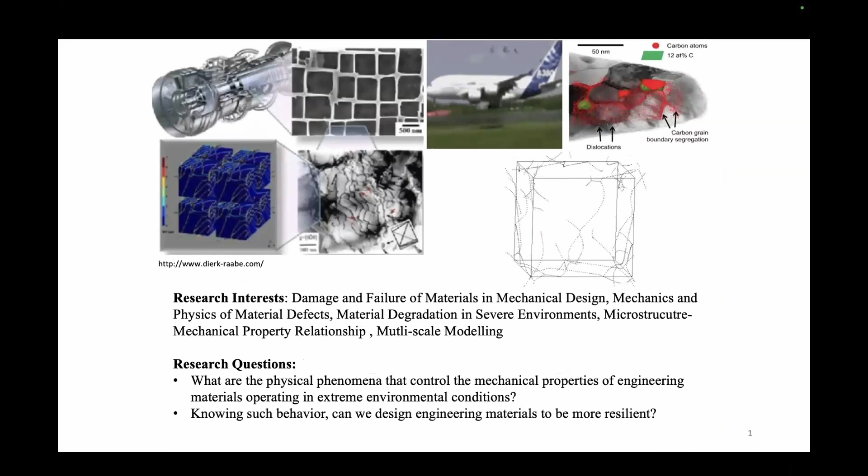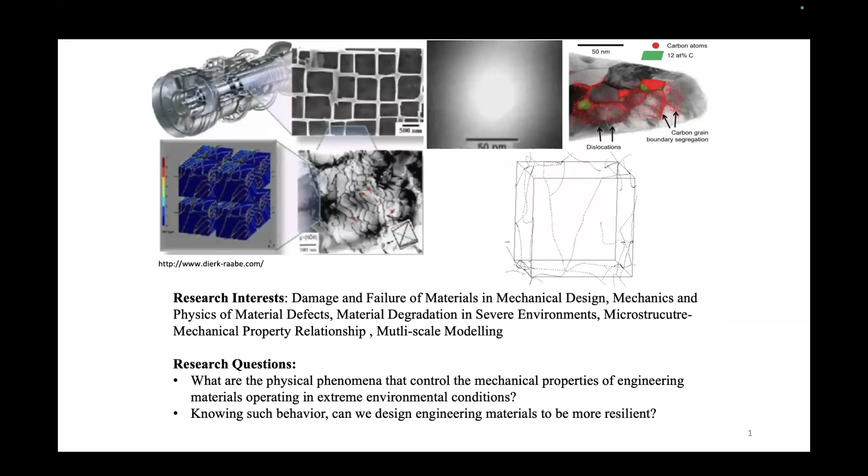So my research areas are multi-scale modeling, fracture, specifically hydrogen embrittlement, and my research questions are: can we control the mechanical properties of engineered materials operating in extreme environmental conditions, and knowing such behavior, can we design more resilient materials, especially for hydrogen embrittlement? Speaking of hydrogen embrittlement, this is the multi-scale modeling schema.

So mostly the interaction between hydrogen and dislocation is responsible for hydrogen embrittlement. So we need to really understand the atomistic origin of hydrogen embrittlement. Therefore, we need to go deep into the microscale. You can do some crystal plasticity or phase fields, and mostly we do discrete dislocation dynamics. And two of the most vital inputs for discrete dislocation dynamics are the mobility law and the stress equation.

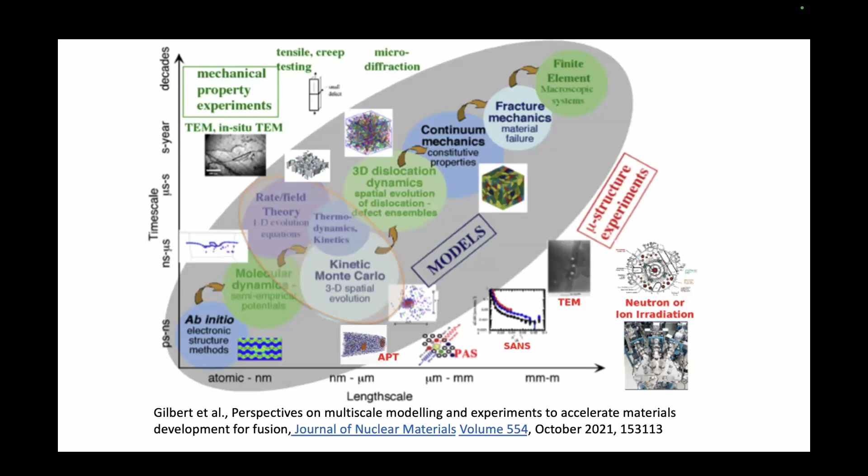The mobility law for hydrogen embrittlement: we really don't know whether hydrogen impedes the dislocation, like slows down its speed, or whether it can shield the stress field of the dislocation and increase its mobility. Then we need the mobility law. Mobility laws can be derived from molecular dynamics simulations, at the atomistic scale. So we performed several MD simulations to capture the effect of hydrogen on the mobility law of edge dislocation.

In the literature, there are some studies that reveal the mobility law of both edge and screw dislocations, and these are the studies. Mostly, phonon drag is the main mechanism for edge dislocation, so there is no thermal activation. But screw dislocations are thermally activated. So edge, like in FCC, is straightforward. The mobility law for edge is just shear stress times the Burgers vector divided by the drag coefficient, and the drag coefficient is just a function of temperature.

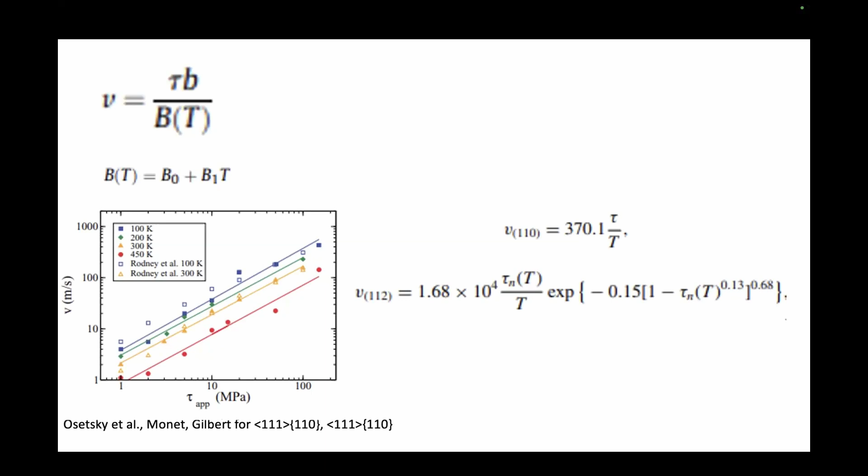So this is just edge. It can be activated at really low stresses, maybe 5 megapascal, 10 megapascal. Since it is not thermally activated motion and it's only phonon drag, the speed of edge dislocation is inversely proportional to the temperature. And here is the mobility law of 110 and 112 in alpha iron. So the motivation of our study is to find the effect of hydrogen on these mobility laws.

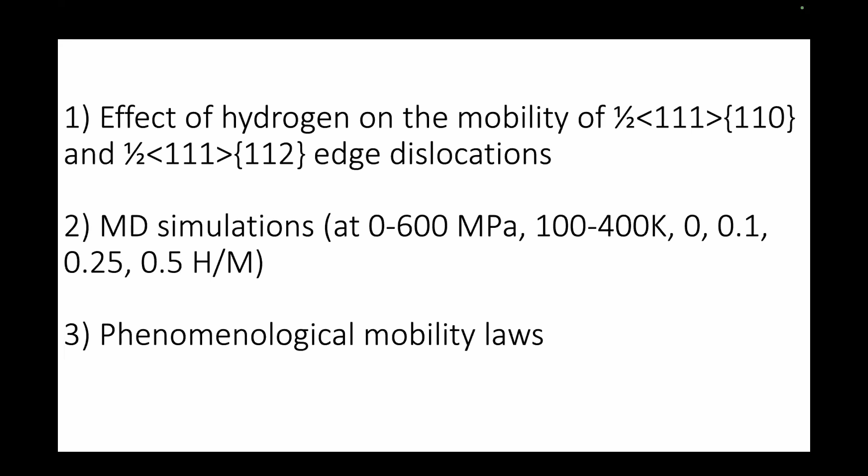So we performed several simulations at different stress levels, different temperatures, and different hydrogen concentrations. And lastly, we came up with several phenomenological mobility laws for edge dislocations. So basically, this is our MD schema. We apply the shear force. The box size is like 30 nanometers, 20 nanometers, 28 nanometers. And we perform the NVE ensemble. The simulation time is basically 1 nanosecond.

During this period, we have many pieces of NVEs. And in between these NVEs, we periodically adjust the volume and temperature to keep the temperature and pressure very near to the prescribed values. So you can also call it an NPT ensemble. We use periodic and shrink-wrapped boundary conditions. Hydrogen distribution is random. Of course, you can do grand canonical Monte Carlo and put a more realistic hydrogen concentration at the core, like we heard from the professor. But for this study, we use a random distribution.

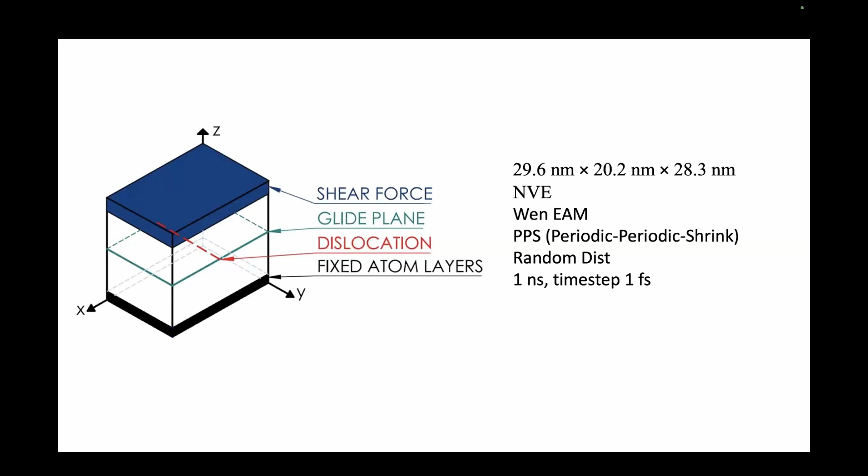The whole simulation time is 1 nanosecond, and the time step is 1 femtosecond. I think it's enough because we also monitor the energy and it becomes steady. So if the energy is steady, your time step is just fine. We didn't use a unit step function when applying the shear force. Basically for 0.5 nanoseconds, we increase the stress. Then at 0.5 nanoseconds, the stress becomes steady, so as not to create shock waves in the lattice. So this is the way we input our shear stress.

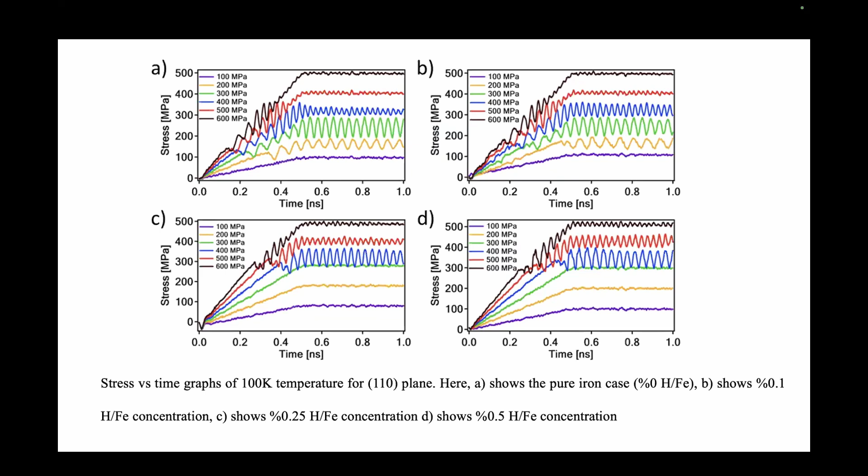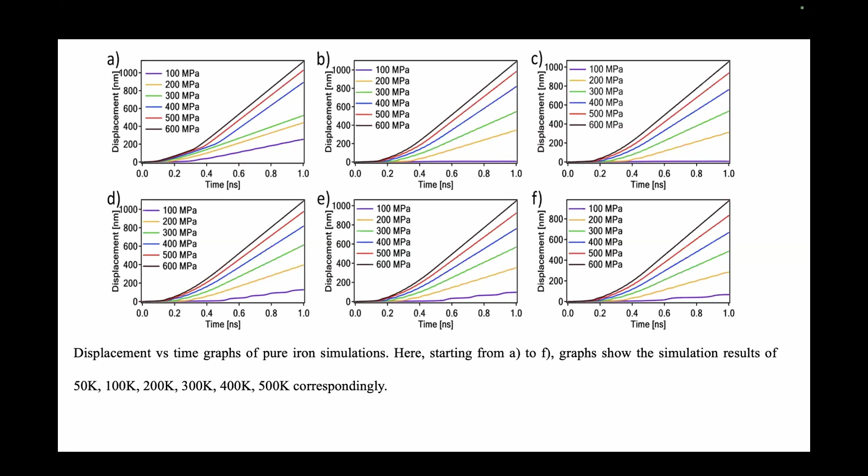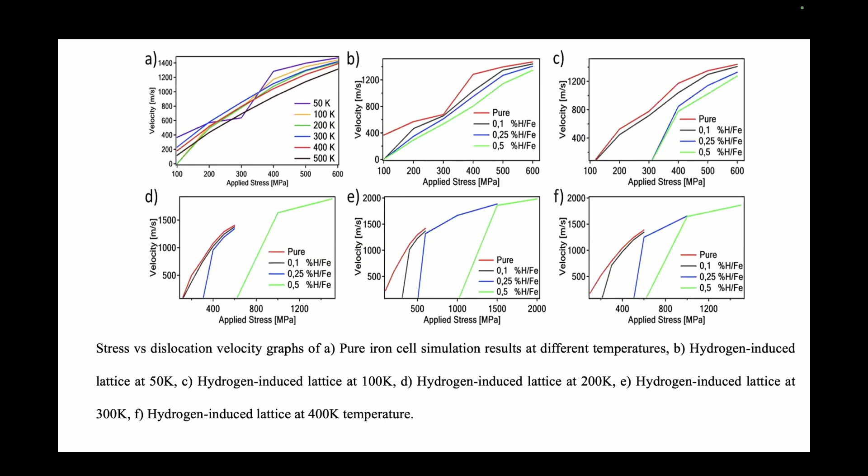Then the next step is to derive the mobility laws. In our calculations, the velocity is tau applied minus tau critical, the critical stress that activates the motion of dislocation, times the Burgers vector divided by the drag coefficient. But here, the drag coefficient is not only a function of temperature, but also the hydrogen concentration. So we have the drag coefficient as a function of both temperature and concentration. Once you plot this with respect to temperature, we get more or less linear lines, so we fit a line equation like y = mx + n.

Here, B0, the constant, is also a function of C. We don't know if it's linear or polynomial, but it's a function of C. And B1 is a function of C times the temperature. So this is just the equation of a line. Then we plot B0 as a function of C, and we saw it's a line, so it's just B2C plus B3. And once you plot B1 as a function of concentration, again a line equation, B4C plus B5. How about the critical stress? Once you plot it as a function of concentration, you get a line equation, A0(T) plus A1(T) times C.

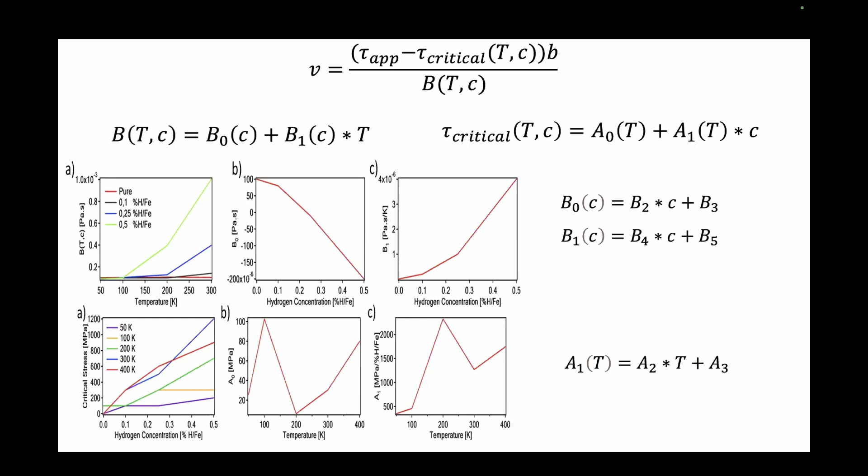Once you plot A0 as a function of temperature, we didn't get a line, therefore we assume it is constant and take the average value for A0. For A1(T), we assumed it's linear and performed a linear analysis, so A1(T) is equal to A2T plus A3. Then we got the numbers and came up with the phenomenological mobility laws for 110 and 112. The Burgers vector for BCC is always 111. For FCC, it's 110, and the planes are 111, but for BCC, the Burgers vector is 111, and we have 3 different planes.

And here, one can calculate the velocity of dislocation at different temperatures and different hydrogen concentrations. So you can do interpolation between these values. Extrapolation might be difficult, so maybe you cannot go beyond values like 0.5 hydrogen concentration, because you might see different dislocation activities at greater temperatures or hydrogen concentrations.